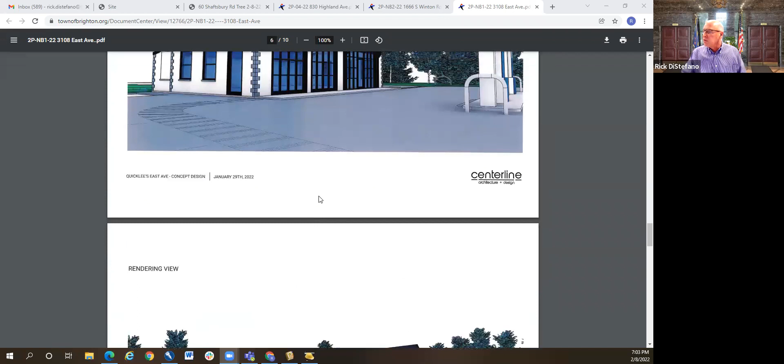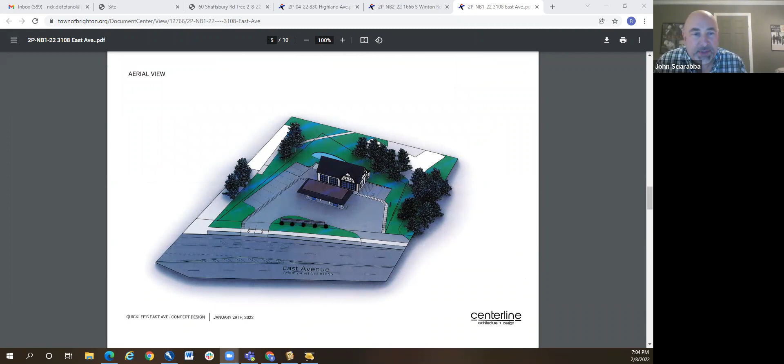All right, good evening everybody. My name is John Sciarabba with Land Tech. I'm representing PEM LLC tonight, part of the applicant for the site plan we're proposing, which is a Quicklee's convenience store and gas station located at this site. As I'm sure everyone knows, this was a former gas station back in the day and has been left vacant for quite some time. Having worked with Rick over the last few months regarding this project, I understand there's been numerous applications related to this property, but tonight what we're proposing is to leave the site essentially intact. We've been working with the Architectural Review Board, and the project architect has presented the project to them. It's been well received, so that encouraged us to move forward with a site plan application.

There are numerous hurdles with this project. I don't think it's related to the site or the design, it's basically the code. This project is located in a BE1 office zoning classification, so therefore a use variance is required. So we have kind of a long haul with this project. We've been working diligently with the town and town staff, but tonight we're presenting you our project, and we want to get your feedback related to what we're proposing.

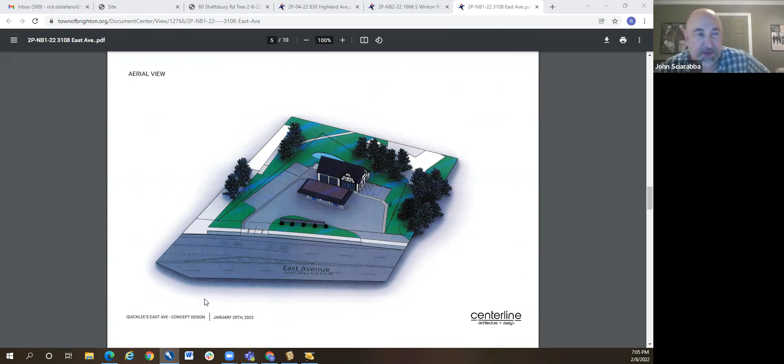The site is a very small site, just over 3/10 of an acre. We have about 71 feet of frontage on East Avenue, and on the north property line it's 173 feet deep, and on the south property line it's about 77 feet deep. Our back line runs to the Friendly Home, and Allen's Creek is back there, and our north line is the fire department. We have existing utilities, sewer, water, everything at the site.

The site is currently almost about 85% impervious. I'm not looking at my detailed notes, but what we're proposing is to remove some of the asphalt and soften the site. So proposed is the only structure proposed is the canopy with 2 gas pumps, and with that we're keeping the 2 access points, but shrinking some of the access on both parts, creating a green island in front. You can see there's some bushes we propose and a landscape wall, and we've also created some other green spaces around the project. So we're basically decreasing the impervious by about 10%.

In the application, we're also proposing 9 parking spots, one of which is going to be a handicap spot. We're incorporating bike racks, trying to encourage pedestrian access to the site, again working with staff and the planning board on that. So as far as a site plan, it's pretty easy. We also know that this is in the Allen's Creek watershed.

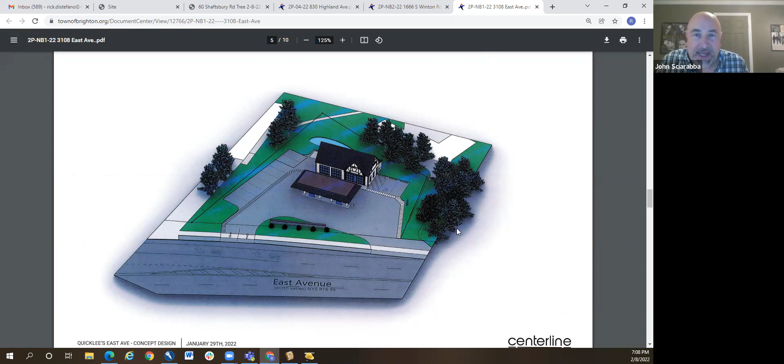I cannot speak to the building too much, but essentially what we're doing—Rick, if you want to show a couple images—is maintaining the original character of that stucco type building, adding some window elements that look like garage doors. Those won't be functional. Just a center entrance, no drive-through proposed. It's really gas and convenience.

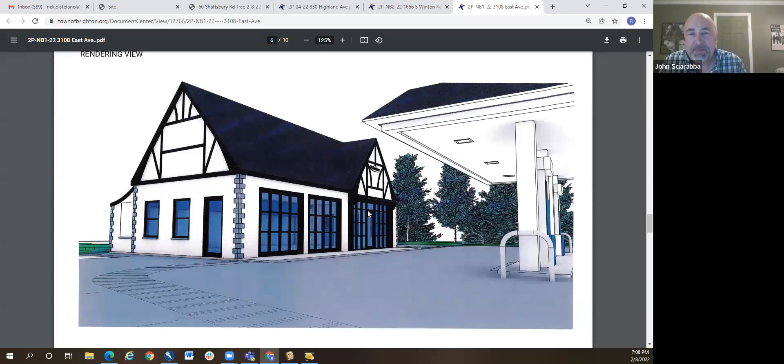And I think the fact that the Architectural Review Board was kind of in favor of this design has really gotten us to the point where we are here today.

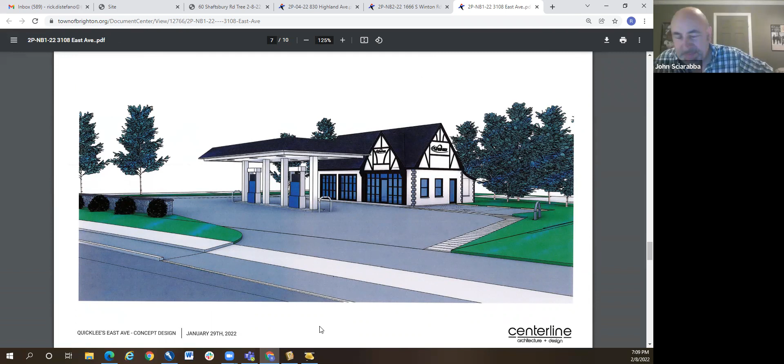John, I just want to clarify that this is the Historical Preservation Commission reviews. Oh, I'm sorry, because this is a historically designated property. So yeah, I'm sorry, Rick. That's all right, yeah, no, I think I'm right about there.

Again, I'm looking for feedback from the board tonight, and any elements that you feel we need to work on—I'm open ears and look forward to working with the planning board in the future. That's all I have, and I can answer any questions you have.

Well, I have purchased petrol at this site for some time, and as I recall there was some problem at the back of the building—fairly minor, a crack in it and so on. So I assumed that would be repaired as part of the restoration here. Yes, we have an architect on staff, and any elements that need to be upgraded or fixed will be part of this project.

And what's the square footage of the convenience portion of this? It's just under 12,000 square feet—excuse me, is it 1,200 square feet? Yeah, 1,200 square feet, excuse me. Okay, thank you.

John, you're showing some light posts, some historically designed light posts. Yeah, thanks Rick. There really isn't much lighting on the site, and we're trying to incorporate some gooseneck historic lighting fixtures so customers can safely traverse the parking lot. So we've got three of those proposed, one on the north side, one on the south side, and one within that green island.

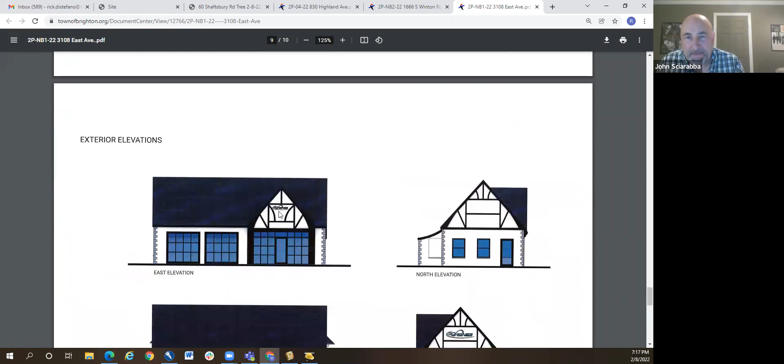We did talk about that little wall on East Avenue - we have a wall element with a sign proposed, so that might be the only signage we pursue, maybe something on that wall and something on the building. But no pole mounted signs or anything like that.

Right, the wall might be a little bit of a challenge. If they wanted to put something on the canopy, that would require a variance. They are allowed to put signage on the building per code.

Just a follow-up: will there be an environmental investigation of this site to determine whether there's been any underground leakage or anything of that sort?

We did prepare the SEQR form. Nothing got dinged at that level. Usually if there was some spill, the DEC would flag it at that point, so I don't think they're proposing any further investigation related to that. I do know that contractually the buyer, my client, is going to do a phase one at a minimum, so all parties involved are aware what the limitations are, and something could pop up during this process. I don't have access to that phase one, but I'll provide it to Rick when it's complete, or if it's already completed.

This is David, and I was out there today, and I see there's a garage and a house behind your lot. Does that give you a little more protection as far as those buildings between your lot and Allen's Creek?

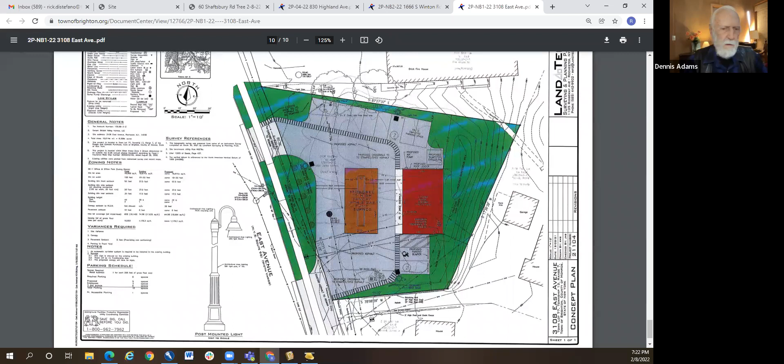All right, what do we have on this? I know we've talked some about this, but we have the letter of intent from Woods Oviatt Gilman.

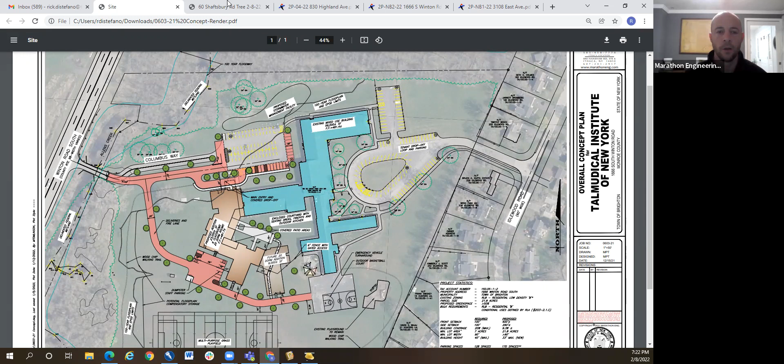Ready, Matt? I'm ready, can you guys hear me okay? Yep, great. Matt Tomlinson, Marathon Engineering. We're the site and civil engineer for this, working in conjunction with Jerry Goldman with Woods Oviatt. We have an application submitted for concept review to the planning board, and we thought it would be of benefit to come hear what the conservation board has to say for initial comments on this as well.

This project is intended to provide a school for Jewish youth. It's a school currently located off of Park Avenue in the city of Rochester that has been looking for a permanent home for quite some time. This property became available and the school district wanted to sell it, and is now under contract with the Talmudical Institute to sell it. It lends itself obviously to school use because that's what it's been used for a long time, although the Montessori school and some other tenants are currently occupying portions of the building space.

The intention here is to leave the existing tenants in the building and relocate some of them to different areas designated in blue that's being highlighted currently. The wing that protrudes on the existing school out towards Winton Road will be converted for a portion of the Talmudical Institute as well as an addition.

Right now the first addition, or first phase, is the brown area there, which is approximately 6 classrooms and 20 dorm rooms with 23,000 square feet. Then a future addition, if the school is successful and their student body grows, will be a future 20 dorm addition, essentially doubling the number of students. That's 9,000 square feet represented at the end of that residential wing.

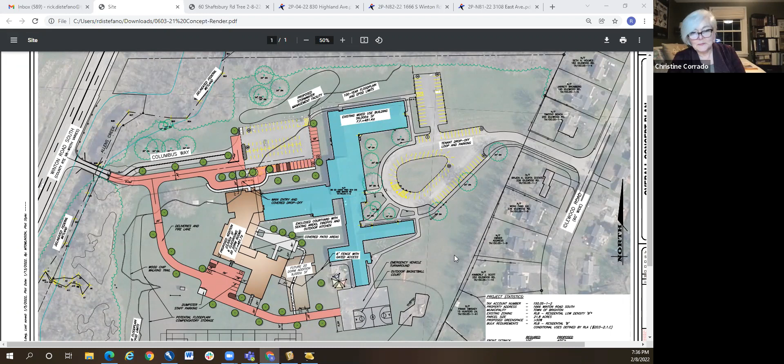If that's all the questions, I've got some answers and some considerations for you there. So I'll just take them in order.

More stormwater treatment, yeah, absolutely. That is something that this site is going to require quite a bit of study and thought on, not least because of how flat it is, but also because there is the overlying floodplain compensatory storage that will be required to be designed and configured in such a way that we can treat the stormwater not separate from, but in conjunction with the storage that we have to create for the floodplain impacts that we'll have with the minimal building and parking encroachments into that floodplain.

So there will be more than just that single proposed stormwater management facility practice that's installed. That is going to take some additional coordination with the town engineer and you folks, of course, as we move this along. So I do anticipate more than just that one practice being present on the site.

Trees on the east side, you'll note we did show many of the trees that kind of ring the bus loop and that are adjacent to the building. The existing trees are shown around the bus loop area. So there's some nice presence and some good sized trees over there, as well as bordering the fence in between the neighbors on Idlewood. Our detailed site plans will have a little bit more information there for you folks.

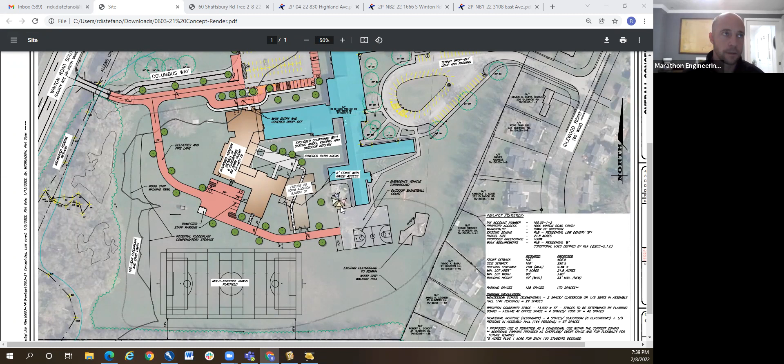The intention here is to provide some privacy for the school and for the students, but also we recognize that this has been a community feature, if you will, for the neighborhood and for folks walking from Idlewood, utilizing some of the open space that they may not have on their own lots. And the intention is not to change that. Of course, if it becomes a problem, that'll be something that's dealt with on a case-by-case basis. But we explored adding fencing, adding gates, making sure that the property was secure, like a lot of schools are doing these days. But that's definitely not the intention of the school, is to close it off.

For a private portion that will be set apart for the existing or the new students that live there, we're proposing to fence the kind of interior courtyard that's created as part of the building addition, and that'll have some outdoor gathering space for the students that'll feel somewhat private because it's in the courtyard, while still allowing the neighborhood to utilize that open space on the property. So again, this is kind of all pending further review and further discussion, but some of the things that the design team and the ownership team is considering as we move along with this process.

Anything more? Well, we have a pretty good list of questions for you. Yeah, absolutely. And we'll incorporate those as we move forward.

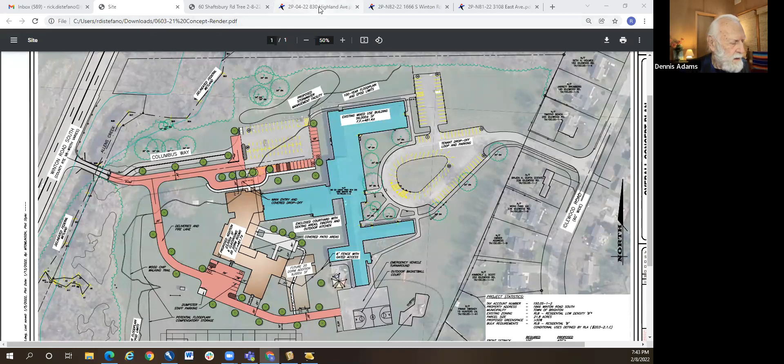Okay. The Tabby property. Yes, the Tabby property. We saw this back in October, if you remember. We really didn't have any comments. It's coming back now for final site plan approval. Basically 830 Highland Avenue, a new house constructed on the side of the hill. They need a steep slope EPOD permit. I'm trying to see if I got a good view.

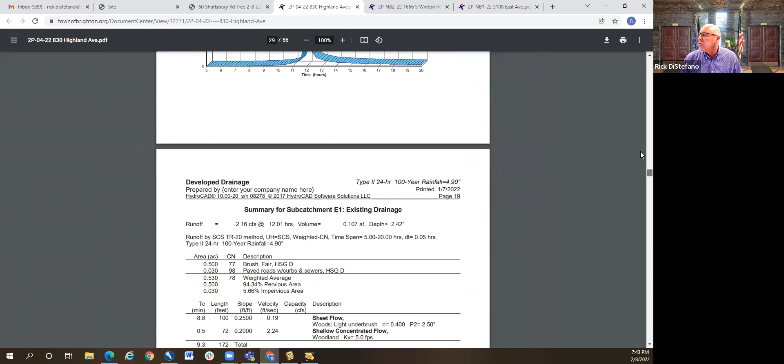So basically the house pad has a garage underneath with a living area on top, an area here for concrete for entering the garage area, and a driveway that slopes less than 10% down to Highland. Pretty still well wooded. Again, no comments previously, so I don't know if you have anything else you'd like to add at final.

I had just one minor question looking this over. I saw that off the garage parking space there are a couple of rooms. One of them is marked studio, and I wondered if that had any water we would need to be concerned with. Well, they'll probably have some type of water hose bib in the garage itself. The studio, I think, is more for one of the owners, like an art studio, a personal hobby type studio. Yeah, I assumed that. I just wondered, typically if I had a studio I'd want a utility sink in. Yeah, and they'll have that down in that lower level—it's like a basement/garage. So sure, I'm sure they'll have some type of slop sink or something in that area. Just a minor point, that's all.

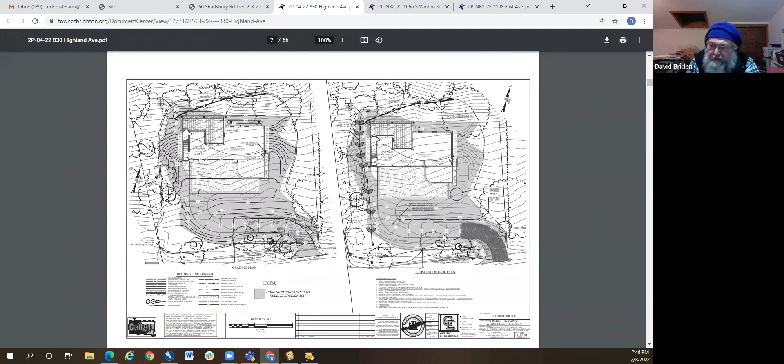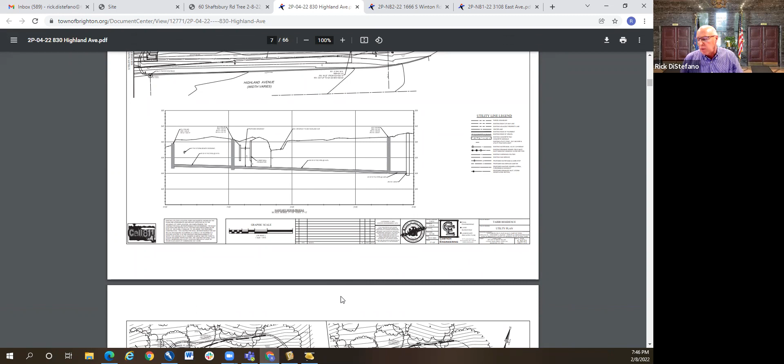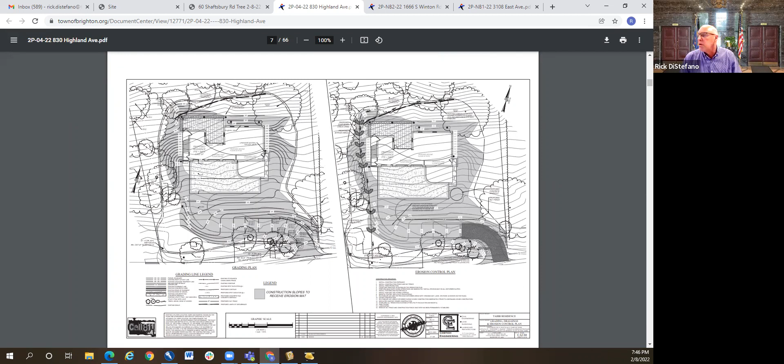This is David. I see they have plans to take down some 13 trees—7 arborvitae and 6 others. A number of those look like they're in fair to poor condition, and only a couple are good. Is there a way to request that same number of trees be planted elsewhere in town to replace these trees? Do we have any input of that nature? We really can't make them plant them elsewhere in town. We can go on site—they are proposing additional plantings on site, but basically they're meeting the code requirements for a new house on a lot. The code requires 1 tree for every 5,000 gross square feet when constructing on a vacant lot with a new house. So obviously they're meeting their code requirements, and on top of what they're saving, they're also adding additional trees throughout. I think they're meeting the code requirements in that regard.

Okay, all right. Anyone else? You have a follow-up question, David? Yeah, but it's for a property across the street—it's not about this one, but okay.

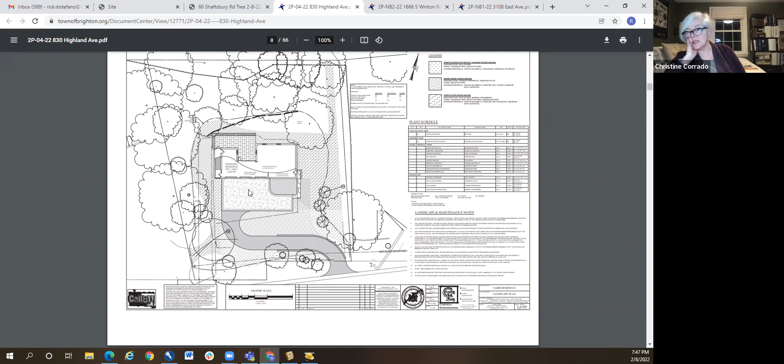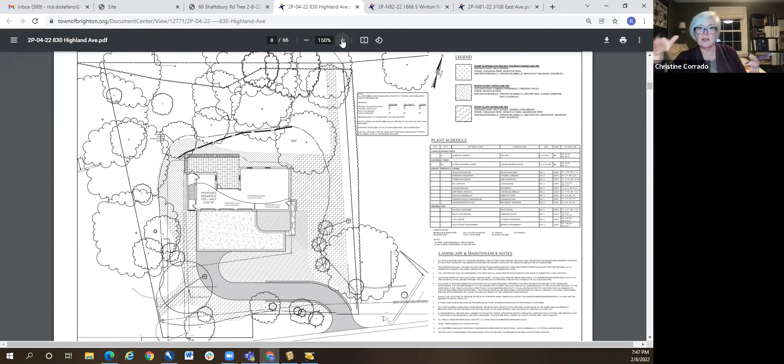So I have one question about the concrete surface, and if there's any potential for them to consider semi-pervious paving there—whether it's concrete that accommodates some water penetration, or pavers with sand grouting rather than cement grouting. Is that something we can encourage them to do? We can suggest it, Christine. We can't make them do it, but we can suggest using some pervious type of surface in there. Yeah, as a consideration. It seems they may find it more maintainable as well—otherwise that front entryway becomes a sheet of ice in winter, and the maintenance could be a challenge. So you get the double benefit of a safer surface, and the runoff isn't diverted the same way as with an impervious surface. We can put that down as a consideration.

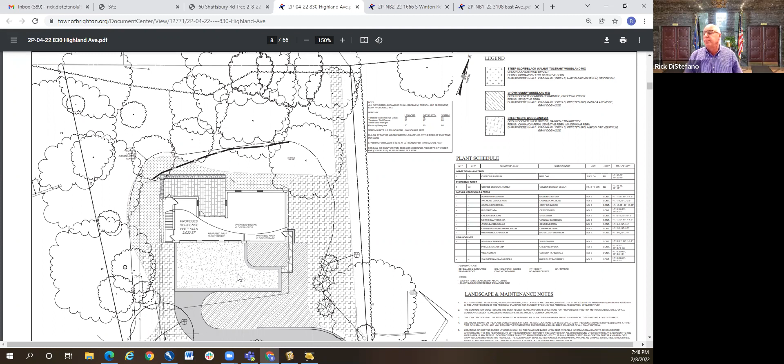This is going to be a really neat house. It's going to be something that you don't see around here, and I wish I had an elevation drawing here. I think we saw it before. It makes me think of things in California, like something you see on the side of a hill, overlooking the ocean.

And all windows along the front, right? Yeah. Are we good with that? Yeah, okay.

And do we have old business, new business? Oh Dennis, can I bring up that other property? Yes, please. I went over there, I guess it was yesterday, and had a look at this.

And I saw a sign across the street, from Howard Hanna Real Estate. The sign said, build your dream home in a Brighton Town Park. Can they do that or even say that? I drove down, it's a Persimmon Park there, it's a little drive, and I guess the property listed is number 57. There's a mailbox with number 57 on it. Can they do that? I don't know exactly where.

Yeah, you know, realtors have a way of saying whatever they want. Obviously, they can't build in our park. Perhaps there is a lot there that could possibly be built on. That would have to obviously come in front of the department, and that determination would have to be made. Yeah, I think maybe the lot is down at the end of that drive, across that. There's a couple of lots down in there.